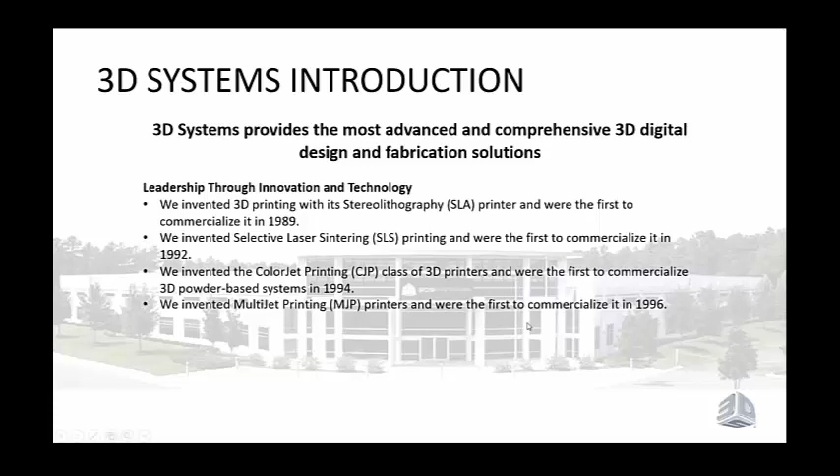So as a company, 3D Systems is well known for having by far the broadest line of 3D printing offerings available. We go all the way from home use 3D printers that are available for less than $1,000 all the way up to production level systems that can print in a variety of different materials, including metals, up to and over $1 million. And there's a whole slew of options in between. And we offer all of these different printers because there are so many different applications and needs for 3D printing, different needs for speed, accuracy, material properties, and so on. So there are a variety of different options.

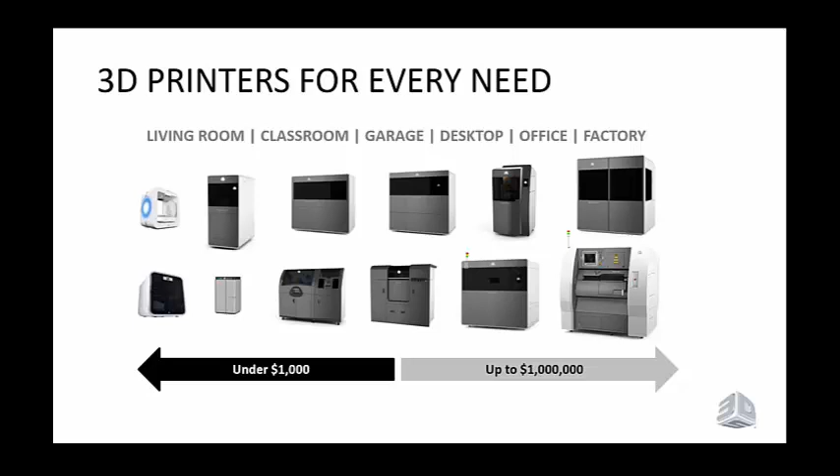Now, when we talk about the applications of 3D printing, we can broadly categorize them into 5 categories. The first and sort of the earliest in the product development process is the idea of printing a 3D model for communication. And this is all about making aesthetically pleasing models that have all of the details and may or may not have color involved in them so that you can communicate ideas. This is great for selling new design ideas. Architects use it to sell clients on design ideas before they've spent the time to actually go through and make the very detailed models and so on. So it's really about the beauty of a 3D printed part when we're talking about communication models.

The next step in the development process is really prototyping or validation, and this is all about printing functional parts that approximate or exactly match the properties that you're going to be getting from a production part later on. And of course, the value that 3D printing offers is that you can have your parts essentially instantly. You don't have to go through a tooling process to get to those early prototype parts. And so you can iterate and come up with many different ideas, and every piece that you print can be different, and you can have them in your hands usually in a matter of hours from when you've designed them in CAD.

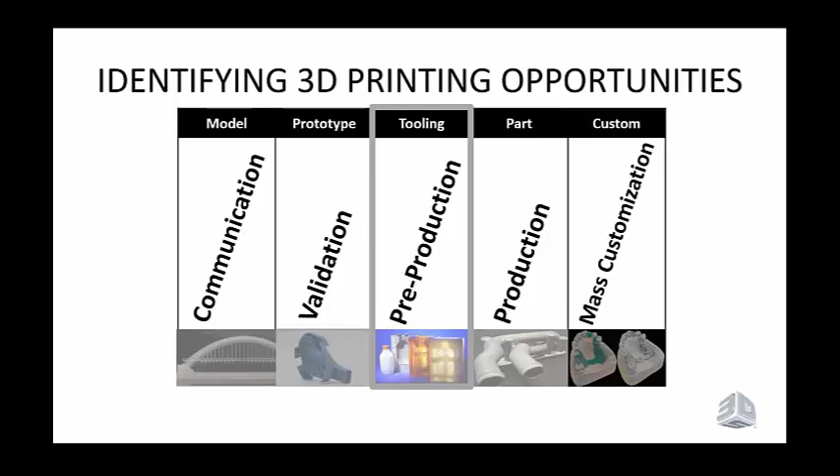With that, I'm going to hand it over to Ray so that he can introduce you to Bi-Link and continue on talking about how they're using printed injection molds.

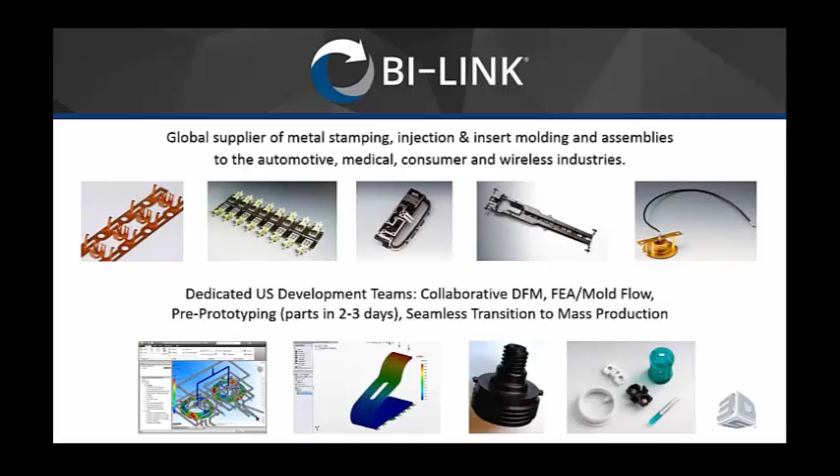Our biggest impact happens when we engage with engineers. We call it E to E. This year we rolled out the hardware store by Bi-Link, and what that is, it's a place for engineers, by engineers, to collaborate with our technical staff and get access to our technology and resources. The idea is to let our clients test, talk, tinker. We want it to be an extension of our customer's model shop with access to a ton of global manufacturing horsepower.

Part of what we do in the hardware store locations, and we have one in Raleigh, North Carolina. We're in San Diego, and we'll be opening up there soon. We host events for our customers, and the idea is bring technical people together to talk about the challenges they face, blend in our tooling expertise, and see how we can help solve problems.

We talk about the Midnight Lunch Lab, which is housed within each of our hardware store locations. That's a nod to Thomas Edison. In our perspective, he was a master at bringing together teams of people with diverse backgrounds to define and solve really big, worthwhile problems. We like that as a basis and a philosophy for us in our hardware store locations.

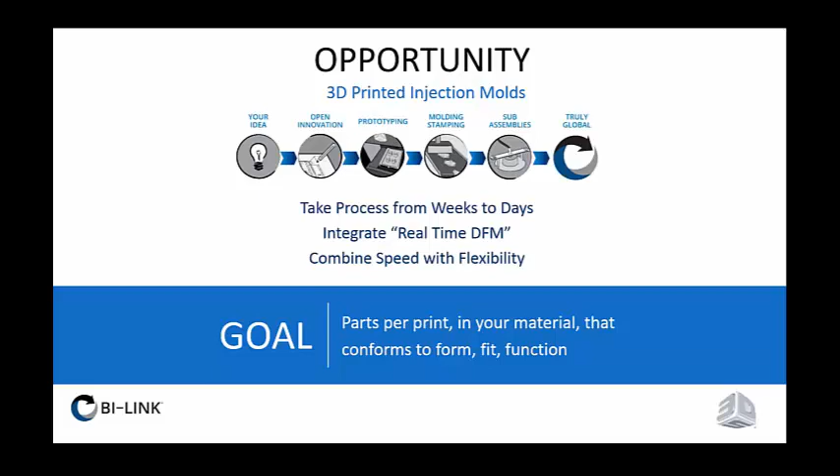What we saw is the opportunity with 3D printed injection molds. A few years ago it became clear to us that our customers across all industries required us to do more, faster. Improvement needed to happen by an order of magnitude, not incrementally. The process needed to happen in days, not weeks. Design for manufacturability needed to happen real time and at every step of the development process. And we had to have speed and flexibility to accommodate changes. Our ultimate goal was, how do we get to the point where we can come up with a few parts per print in the specified material that conforms to form, fit, and function, and we need that now, not later.

So how do we get here? As Tom mentioned earlier, complexity with additive manufacturing is free. Tooling is complex, so by extension, additive manufacturing should at least be part of the solution.

We learned that it's really more than that. We did some preliminary research and saw that printed molds had been attempted. Anybody that checks online and looks at YouTube, the problem we saw was that it was the same spoon and impeller that had been shown on YouTube for years. There was really no evolution in it.

So we started experimenting. We placed a small initial bet. We bought a Cube printer for $1,000 and started goofing around with it. Had some reels of PLA, and you do what manufacturers do, you tinker with it. We saw what it was good at, we saw its limitations, and most importantly, it got us asking more questions. What we found with the team from 3D Systems is they were a really big help and provided a lot of resources for us.

Ultimately, and we looked across the industry, we settled on the ProJet 3500 HDMax as our technology base and platform that we wanted to build off of to get to the next step, which was to 3D print injection mold tooling for prototype samples.

What we learned that kind of defied our original expectations: printed molds can take a lot of heat. As Frank will discuss in some of our case studies, we're running everything from polypropylene through liquid crystal polymer through printed tooling, and heat is not the enemy of the tool, which surprised us. We thought that was going to be a limiting factor, and it wasn't. Compression is your friend. The nature of the materials and how it's printed, they can take and respond very well to compression, which works well in the injection molding process.

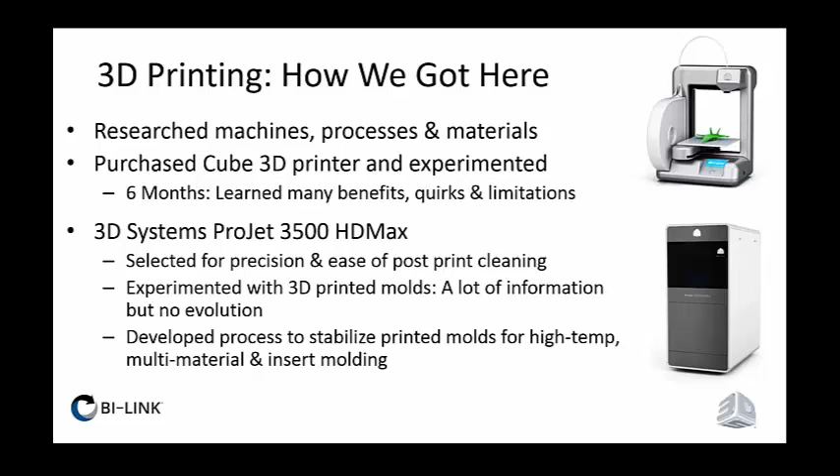We've even been able to do multi-material. We've done insert molding, and we'll share examples of those case studies with you right now. So with that, I'll turn it over to Frank Zaberna, and he can walk you through the applications.

The parts are exactly to print. The molds make them the right size. There's not a problem with warpage or twisting or anything else. The parts are extremely stable in these molds because of the way they cool.

And the temperature, it's thermally inert. What we find with this material is it's pretty much dead to temperature. It doesn't really absorb a lot of heat, which I think is why you could inject into it at such a high temperature.

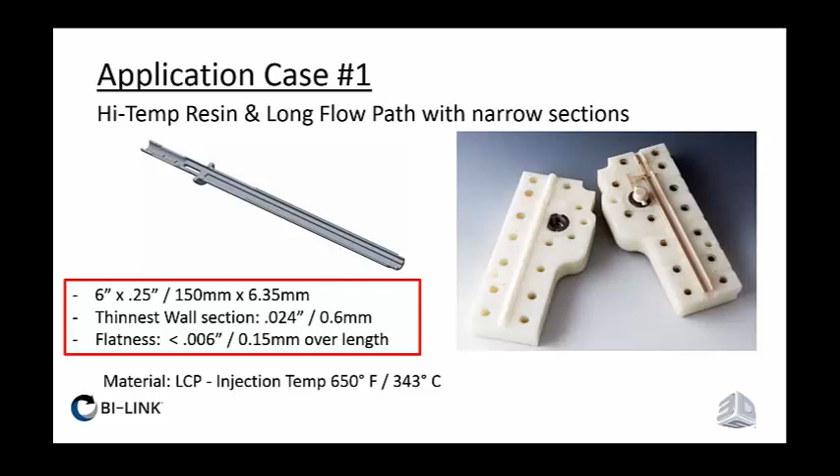When you go to cool parts, you have to be careful. It'll take longer to cool than you're used to because it won't remove the heat from the material. But an upside of that is you get extremely flat parts because they cool so slow and evenly. So that's one of the reasons, once you learn how to use that to your advantage, that it doesn't absorb the heat, it lets you inject some pretty interesting parts. Cooling the material in the mold isn't an issue, so you could keep it flowing longer and really fill up into some thin sections. This was a part we did in an elastomer.

This was a test part, so it was still in development. We did 4 spins on this part within 6 days, and that included shipping them. Basically, the customer would get the parts in the morning, check what they needed, and do a modification.

We printed the mold last night. It's running this morning. I loaded the tables with 2 molds this morning that are going to run parts tomorrow morning. Those are ABS gears, so they're fairly involved parts, and the material's a little higher temperature. But given the right part, the right size, you could easily turn these in a day.

If you get into steel cores for some real thin sections, it's going to take longer to make the steel. But this particular mold in the picture was about 12 hours to make, and the part was exactly to print. The finish was nice - there's actually some lettering on the part that doesn't show up in this view. It was exactly to print, and they ran it, did their testing, figured out where they needed to make changes, and we made them another part.

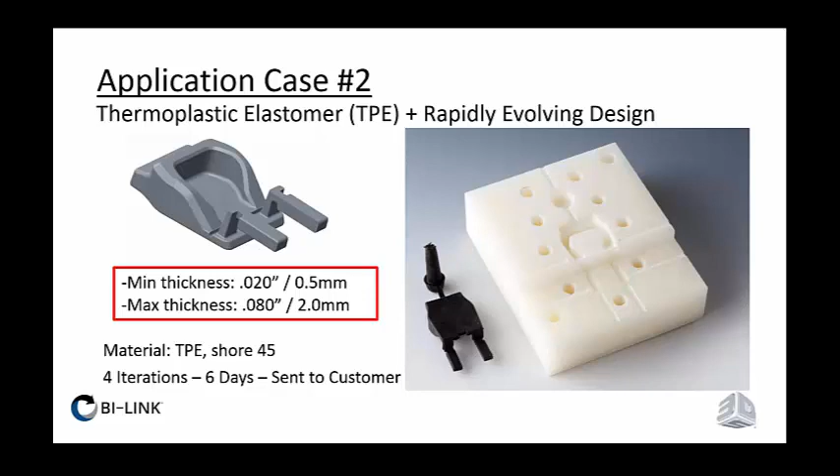At a given pressure, it's like anything else. If I go past the clamping pressure on my machines, which is 10 tons, they're going to start to gap. But if we clamp them up properly, flashing's not a problem with these molds. The parts come out clean, regardless of the material type.

We do insert molding with it. This one here, the gold-colored parts - those are metal inserts that we put into the 3D printed mold and then shot the contact housing around them. So we do quite a bit. We've insert molded metal contacts, plastic tubing, fiber optic bundles, actually other plastic parts inside of another piece of plastic in these printed molds. So pretty much anything you could do in a metal mold, any type of tooling you would do in metal, you could do in this up to a given size.

Normally our molds are about a 4 inch by 4 inch size. So if you could stay inside that size range, it'll handle most anything. Different types of insert molding - whether you're molding in tubing, fiber optic bundles, or metal - you could do that process with this tooling and still be able to do it in a day.

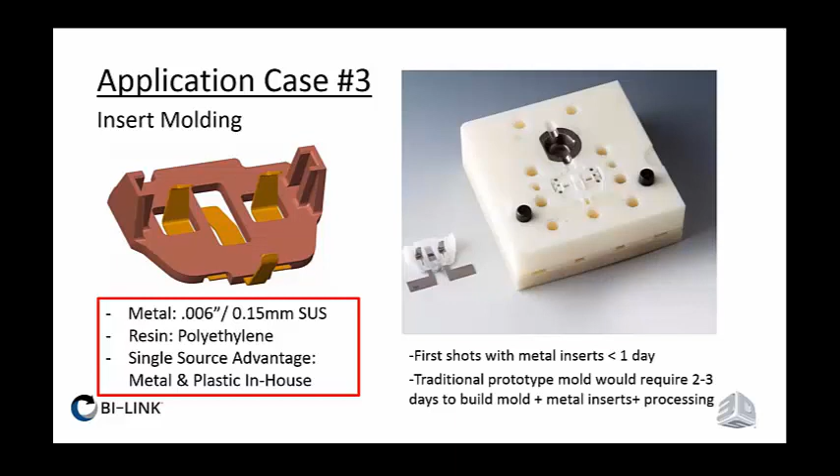Now what I'm going to do is talk to you about the ProJet 3500 series printers. As Ray mentioned, what Bi-Link uses is the top end of the 3500 series, which is the ProJet 3500 HDMax. But there are several models available that offer different speeds, different build sizes, different accuracy and resolution offerings, and of course come in at different price points. The ProJet 3500 series prints functional plastic parts in high definition, and it can be used right in your office or out on a lab floor or shop floor. It's quiet enough and clean enough that it can be used in an office, and a lot of customers do choose to use it that way.

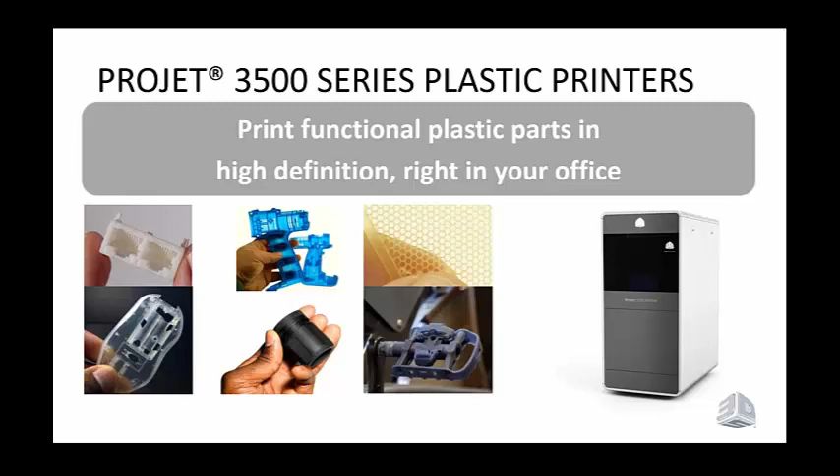The ProJet 3500 series prints really beautiful functional plastic parts, and you can see just a few of the different parts here. We can run materials that are white, black, clear, and we have a variety of other materials I'm going to go through in just a moment. But you can see some of the different applications, and a lot of people are using ProJet 3500s to print prototypes or to print some end-use parts.

And then, of course, we have the more novel use of the ProJet 3500 to actually print tooling, like what Bi-Link is doing. Another example of printed tooling is the image you see in the upper left-hand corner, which is hydroforming of sheet metal. That piece underneath the formed metal part is a printed mold pattern that is then hydroformed at many tons of pressure.

And as Frank and Ray were talking about earlier, the materials that come out of the ProJet 3500 and the parts that come out of this printer stand up very well to high pressures, so they can be used in applications like hydroforming as well.

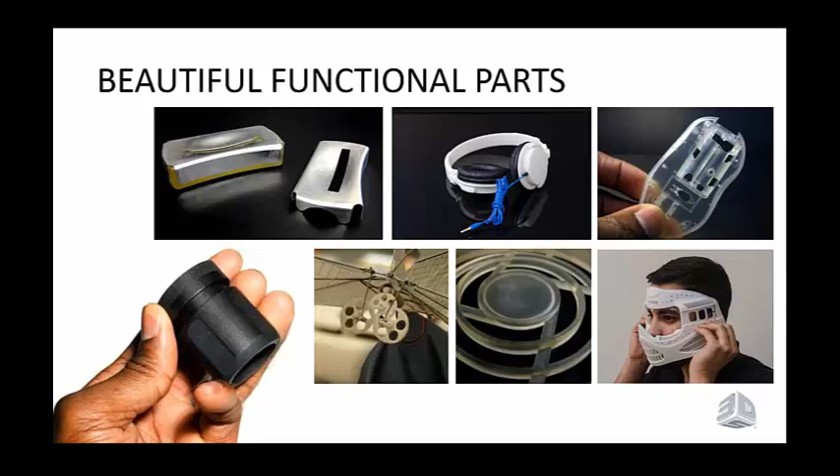These printers are known for their really excellent detail resolution. You can see some of the images here showing the level of detail you can get. This little Buddha statue on the left-hand side is only maybe 2 or 3 inches tall.

That's a few centimeters tall, and you can see all the fine details on it. Parts coming off the Projet 3500 are aesthetically pleasing. They can have all the detail you want, and we offer some really beautiful materials you can print in. But more importantly for most people, they're very, very accurate. They have great fidelity, and you can see every detail, and you can get every functional component you need out of this printer.

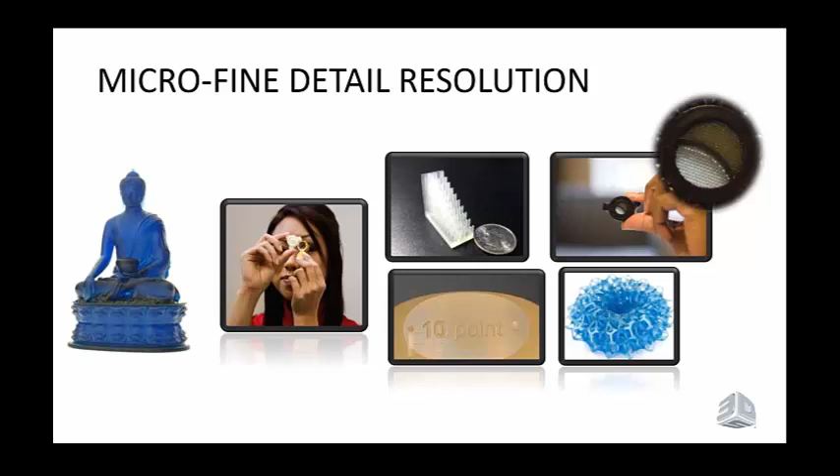The Projet 3500 uses, as I mentioned earlier, our MJP technology, which stands for multi-jet printing. This is a technology where we're jetting out a photopolymer and curing it with UV light.

One of the benefits that our MJP technology has over other printing technologies is you get really consistently sharp edges and corners and very smooth sidewalls. You can see some small parts here with really tiny holes and features, and they all come out beautifully, which has some aesthetic value, but more importantly, there's real functional value when you've got parts that need to mate with other parts or have very small hole features. You get very crisp, sharp definition out of the Projet 3500 that you don't necessarily get out of many other print technologies.

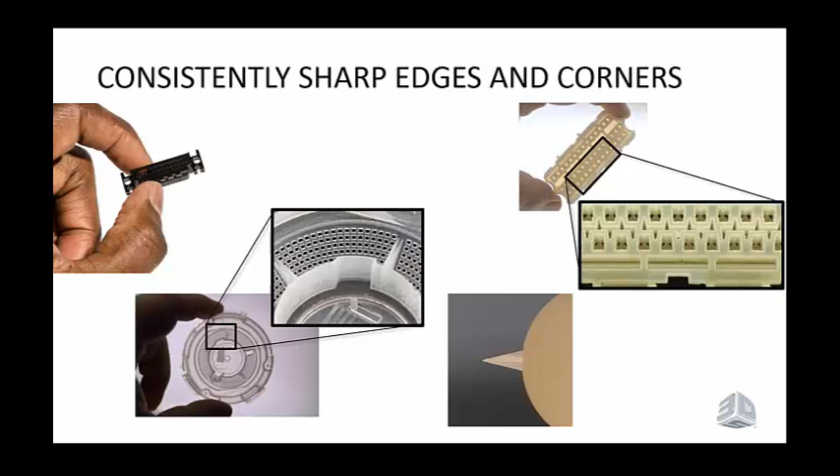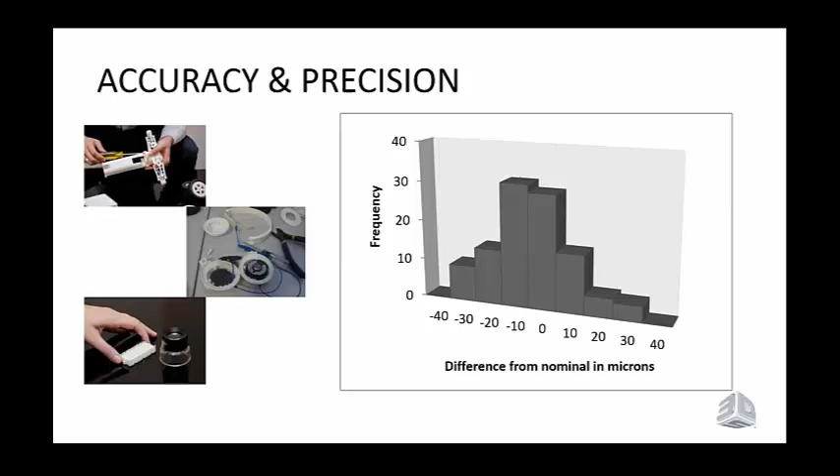These printers are known for their accuracy and precision. The parts that you print will snap together. They can be assembled very effectively together. In the example that BiLink is using for printed molds, they will clamp together and you won't have flash, which is another benefit of the accuracy, precision, and edge definition you get out of the Projet 3500.

And the parts that come out of these printers are strong, strong enough for real-world use in certain situations. A couple of examples here: on the left, the upper and lower image show Nissan Motorsports in Australia, who run their race cars, which are V8 Supercars — Australia's equivalent of NASCAR — with 3D printed components in them.

The particular component you see in the upper left is a blower motor housing that was printed because the stock blower motor housing the team was sourcing was breaking under the stress of these vehicles running in 100+ Fahrenheit temperatures for long periods, with very high vibration and a high heat environment. The stock parts weren't able to take it, so they redesigned the part, made it stronger, knew exactly what they needed to do, and were able to print those on a Projet 3500, put them in their cars, and race with them.

And on the right is another BiLink mold example. You can see the mold up top and the part that came out of the mold down below. As we've been talking about, the materials used in the Projet 3500 are coming out plenty strong for this application.

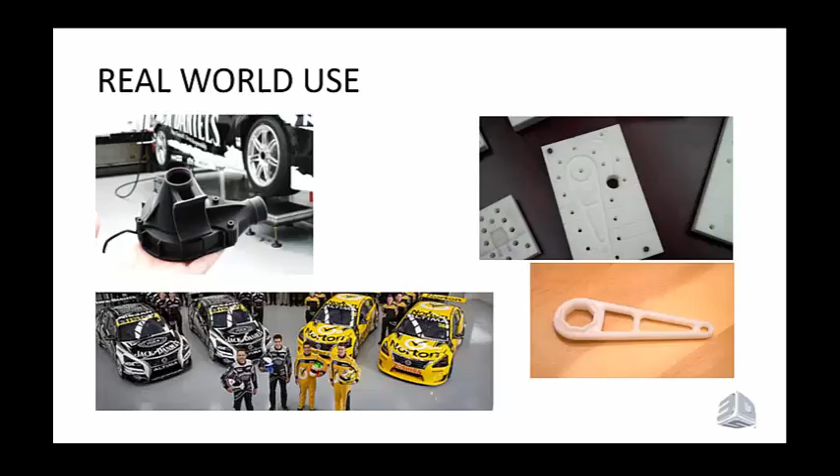Speaking of materials, we offer a variety of different materials. There are different colors with ABS-like performance. We have materials that are biocompatible and USP Class 6 compatible for medical applications. We have translucent materials, and we even have castable materials so you can print and then cast in a metal of your choice off the Projet 3500.

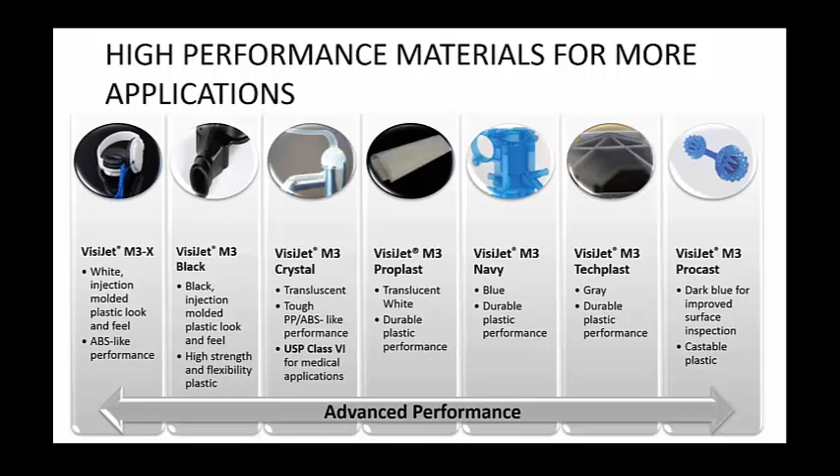I should mention that we're talking about the Projet 3500 plastic 3D printers. We also have a line of Projet 3500 wax 3D printers. We don't cover that in this presentation, but the wax 3D printers are used to print sacrificial patterns for a variety of different casting applications.

Some of the other benefits of the Projet 3500, and one that it's really well known for, is its melt-away wax support. Like all 3D printers, the parts being printed on this machine need to be supported while they're being printed layer by layer. The way we do supports in this printer is with wax, so it's very simple and essentially hands-free to post-process these parts. You take them out of the printer with the wax holding them up, put the whole part into an oven, and the wax simply melts away. It's almost entirely a hands-free process.

You do a little bit of hand work after you've put them in the oven, and they're ready to go. One of the huge benefits is that because you're not manually cleaning these parts, there's little to no risk of breaking any delicate features as you're trying to remove the supports, since it's just melting away. There's no special waste disposal required because it's wax coming off the parts.

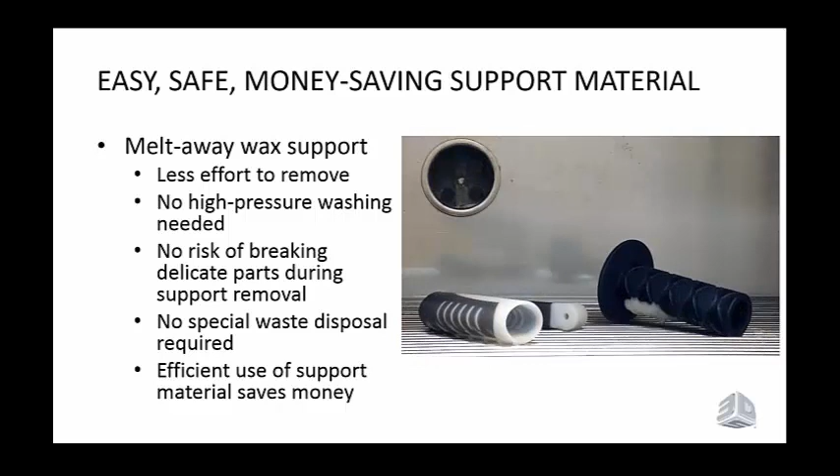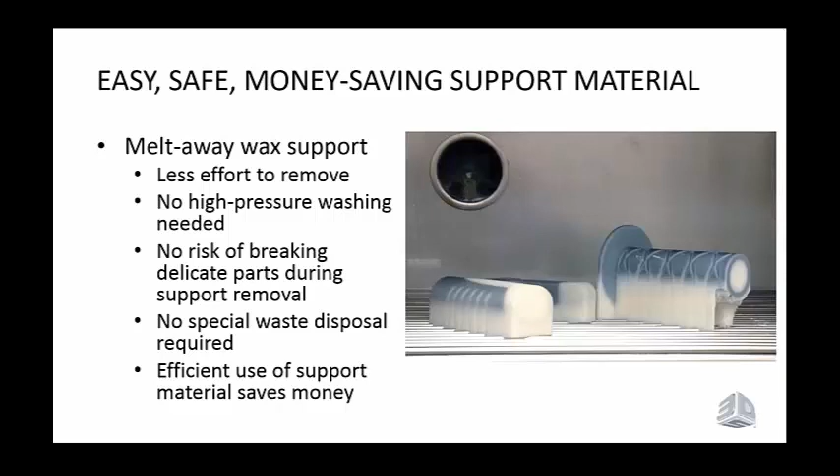It's a very efficient use of support material because, in fact, it's not solid wax that's printed. It's about 40% air that's left inside the wax support structure as well. So it's a very efficient use of support material.

The Projet 3500s have long-life print heads, very low maintenance, and they come with a 5-year warranty, which gives you peace of mind and lets you know you're going to get 5 years of good, strong use out of the print head in these printers.

As I mentioned earlier, they're known for their efficient material use, and we have Android and iPhone apps so that you can manage and monitor prints remotely with the printer. So again, it's an easy-to-use system.

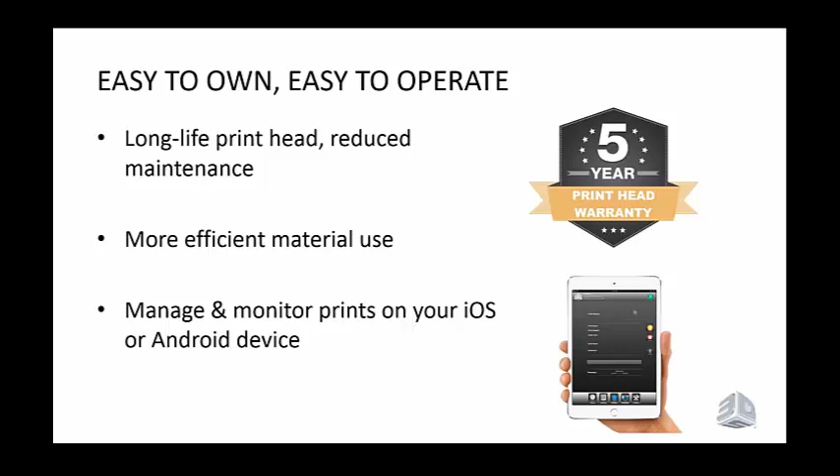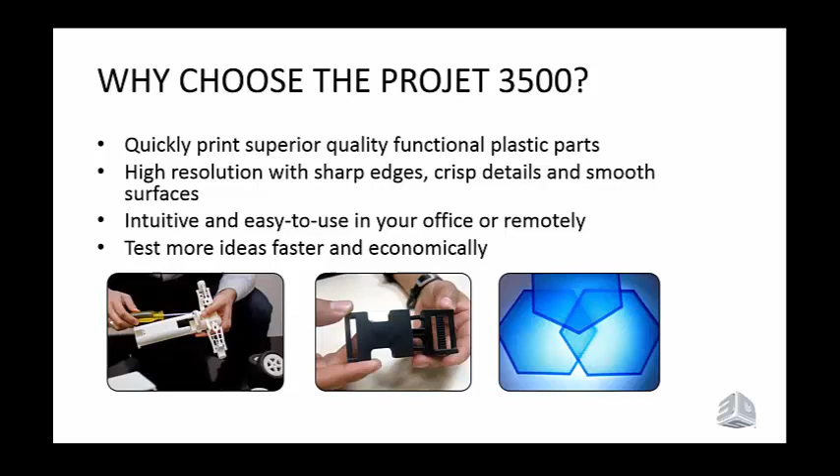So why choose the Projet 3500? Just to summarize, because you can quickly print superior quality functional plastic parts. They're very high resolution with sharp edges, crisp details, and smooth surfaces. It's an easy-to-use, intuitive printer. And ultimately, it's all about being able to test more ideas faster and very economically.

So now I'm going to turn it back to Ray and Frank to talk about some of the results they've seen from using printed molds.

Thanks, Tom. Just to run through the high-level benefits we've seen across these three applications, and we come across new ones every day. The first part we looked at with the high-temperature material, the LCP, was part of an 8-part package we received from a medical device client, a major player, major company. What this process allowed us and our customer to do, because of the ability to compress the design and development schedule, we actually helped them pursue a parallel project to one that had already started a number of weeks earlier. In about a 4-week period, we had a working model in production materials that concluded at about the same time as the original project. So it allowed our customer to basically double down on their development effort based on the much shorter lead times to bring the product to market.

The elastomer project, as Frank mentioned, really helped our customer with an internal project. Without the speed we were able to come up with, they would have really missed the window of opportunity. The speed with which we're able to do this, and the flexibility it brought, was a huge advantage for the customer. These are major players we're working with, people who understand what best-in-class looks like across all segments of the supply chain, and speed and accuracy still wins.

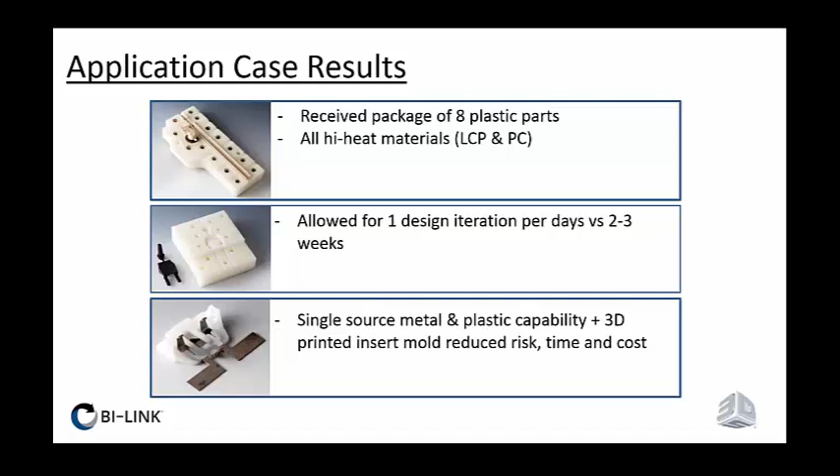All right, so that wraps up the presentation portion of the webinar. We're now going to move into our live Q&A session. My colleague, John Paul Velasco, is going to come online, and he'll be reading off your questions, and then we'll do our best to answer these.

So the first question we've gotten is, how do you predict production mold cycle times using this approach? We'll still use the traditional simulation tools. We run mold flow analysis, so the cycle times don't really correlate because, as Frank had mentioned, of the thermal characteristics of the printed tooling material versus what you would see in a steel mold. So you kind of need to look at it a little differently. They're independent of each other.

Printed mold cycle times, just by definition and based on the thermal characteristics of the material, are longer. But again, we're focused on using this process to come up with that first 1, 5, 10, 20 pieces right now. In parallel, using what we've learned in the development process, we'll go back to the regular simulation tools plus our 50 years of experience to dial in a production cycle time.

Great. Thank you so much. So the next question is, how much post-processing is required to finish and resurface the cavity surfaces? We don't do any post-processing on them. To update the finish on the molds? No, we use them as printed. Yeah. There's no secondary sanding or anything else. No, they're used as printed. What resolution do you print at on the tools? The medium resolution, the UHD, I believe it is. Yes.